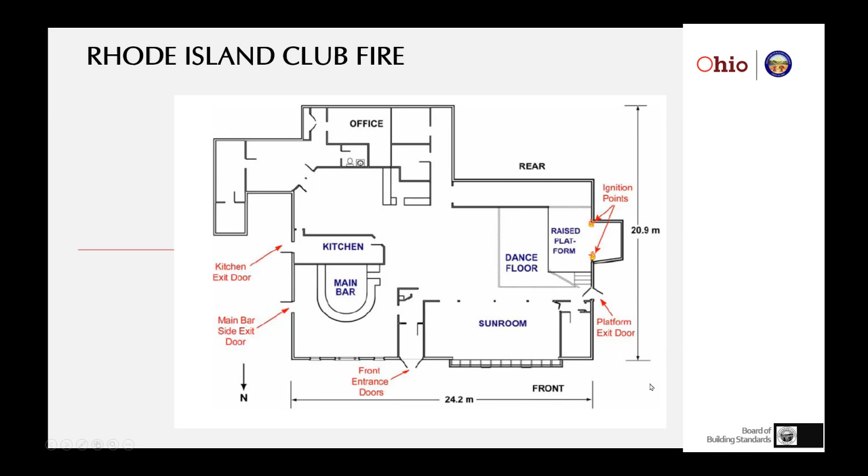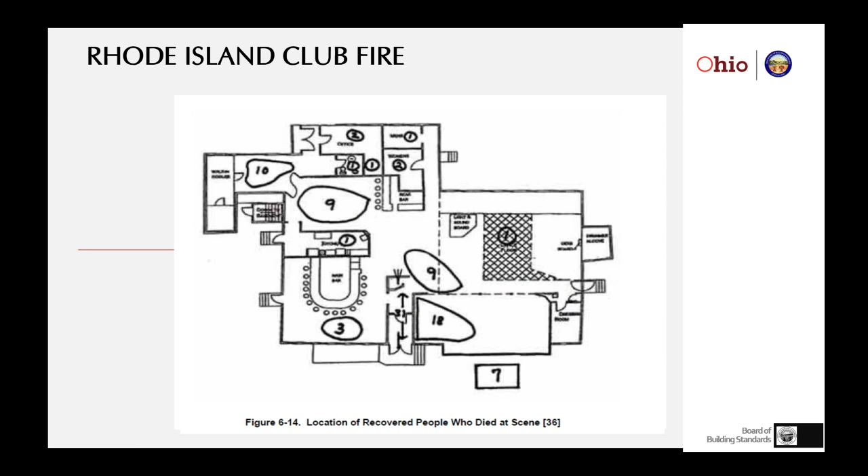Now, these types of problems are why we're trying to understand how to effectively enforce the code and what's behind it. A lot of the code changes that the legislatures, the public demands, are from either excessive enforcement, and that's when the board will get a complaint, inadequate enforcement, when there's usually a loss, or a disaster, hurricanes, tornadoes, floods, and those three things have historically driven what is behind the provisions in the code. In this case, there was inadequate enforcement at this club.

Those materials had been installed without approval. Fire service had done their investigations, and let me just go back, I wanted to point out that there were 100 killed, 230 injured, 132 escaped in 5.5 minutes. The polyurethane foam produced dark smoke, carbon monoxide, and hydrogen cyanide gas.

In Minneapolis, most people don't realize, around that same time, there was also a nightclub fire where the gerbs ignited some material, but we don't hear about it because everyone escaped, because they had actually properly prepared the crowd. They did what the fire code required. They had pre-event announcements of where the egress, the exits were. They had a staff that was trained to assist in the case of an emergency, and all the people there in that Minneapolis nightclub fire survived.

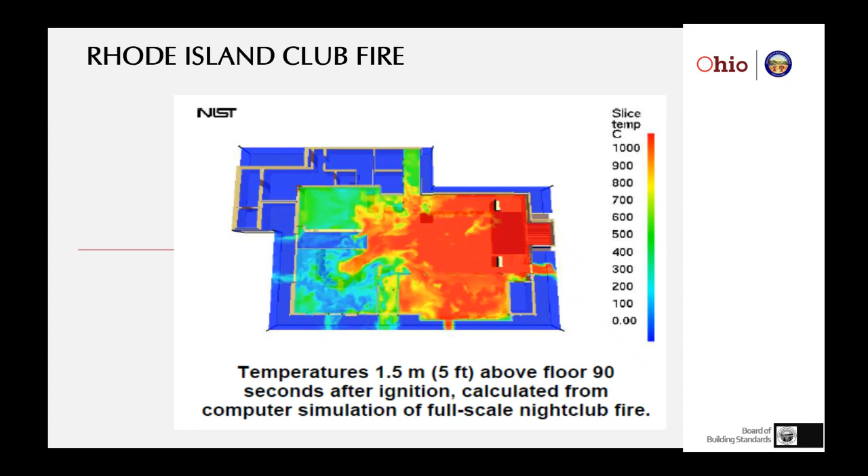So what we want to talk about is these things that have driven code changes and what's behind those provisions and how they impacted the codes. Generally, we respond to these unacceptable losses after an event. And I've gone back to 1906 and looked at some of those events that have impacted the building code. Triangle Shirtwaist Fire had some impact in egress, Collinwood Fire, and a lot of the school fires back in 1908 and around that time.

Egress, protect in place, fire drills, the Cocoanut Grove Fire in Boston, some of the materials that were used in the building, the Beverly Hills, Kentucky restaurant fire in 1977. Some of you may remember that. The MGM Grand Hotel fire had to do with fire stopping at the perimeter curtain wall. The Kansas City walkway collapse really brought Chapter 17 into the building code.

The Chapter 17 that we have today was because there needed to be special inspections for structural components, because the provisions were in the standards, but no one looked at the provisions for change orders, structural requirements, and detailing. And as a result of that, there were provisions put in place requiring special inspections. The earthquakes, floods, hurricanes, Scottown, the Ohio consumer fireworks store back in '96 that killed 8 people, brought in some specific sections in Chapter 4.

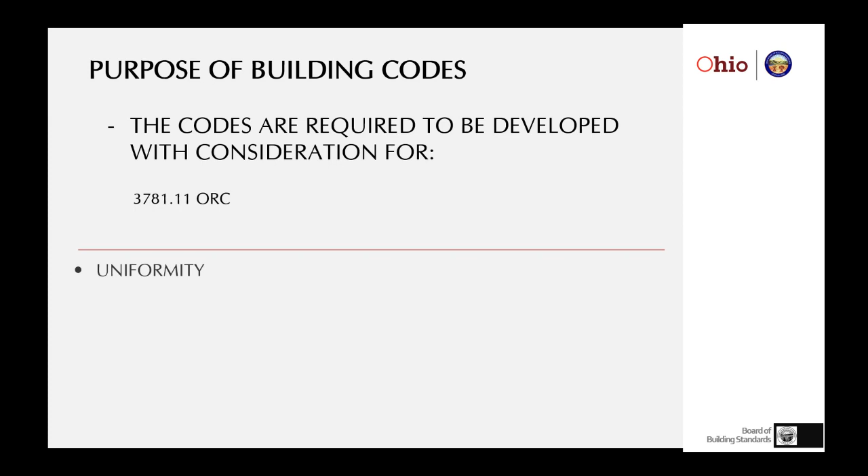When tragedies are tied to the code, the code responds. We want to look at some of those provisions. Now, in our provision of law in 3781.11, the legislature said that the board's rules had to do these 3 things. So what's behind Ohio's code really is established by law. And it's clear that we must develop a code with performance objectives consistent with how materials and products are used.

Permitting new materials and new methods that might reduce the cost of construction, but maintain acceptable risk thresholds. That's another principle that's behind our code. So when the board adopts new rules, we're always looking at the means and methods and its cost impact. As long as it reduces cost while maintaining or improving safety and sanitation, the board will adopt those new provisions.

And then encouraging standardization in methods and materials. Standardization is a great way to drive costs down as long as you don't prefer one material over another. And that's what the legislature said as well. Your rules, Board of Building Standards, should encourage standardization of construction, but they should not prefer one material over another or one class of material over another.

And oftentimes the codes are approached by people as a barrier to entry, as a way of securing a unique, favorable position for their materials. And oftentimes in the code hearings, those are discovered and defeated when code change petitions and applications are submitted. And that also happens at the state level. So at the state level, this is what's primarily behind the codes.

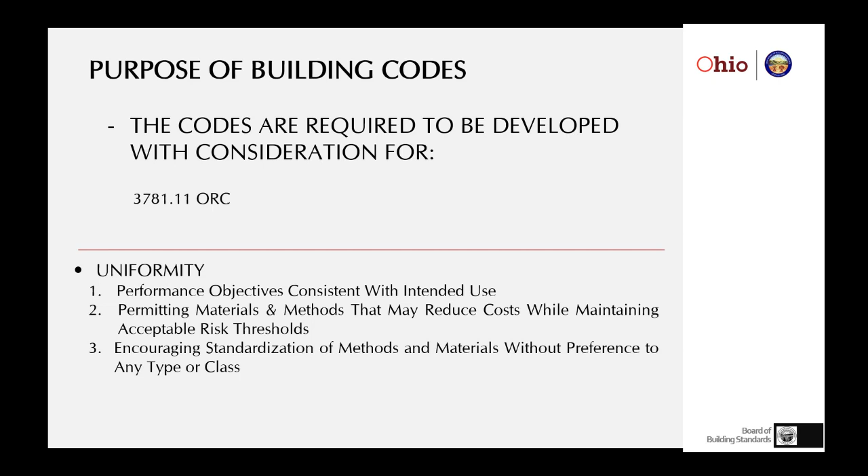There are primary considerations at the model code level for life safety, health, ventilation, plumbing, etc. We're going to provide for a healthy environment. We're going to make sure we keep those in the building safe and those around an event safe. We're going to protect property, whether it's critical facilities protection like police stations, power plants, hospitals. We're going to try to reduce the replacement costs for communities, things such as schools and public buildings, that if we protect them using risk management tools, will actually prevent the public from having to rebuild things.

Quality of life, energy, accessibility, renewable resources, sustainability, green. While those are not life safety provisions, they do impact welfare. They're more policy issues. So those 4 factors are primary considerations for the model codes when those model codes are being developed.

Now, the code types that are being developed generally fall into these categories. There are 3 categories: the land use and environmental type codes. That's the zoning, architectural review, environmental review, that local communities use to establish the baseline for their community, how it should look, where they want things located.

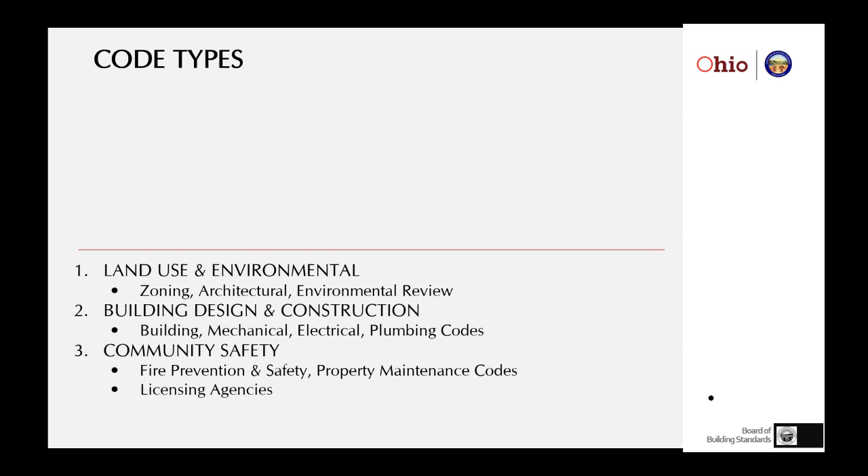And the last are the community safety codes. Once a building is located, once it's built, the fire prevention and safety and property maintenance codes make sure that it's maintained that way. And licensing agencies control who does work in alterations, additions, and repairs in those buildings. So this family of codes helps establish a safe, sanitary built environment with those considerations behind them. Now, obviously, if a code doesn't stay current and becomes obsolete, it's no benefit.

And we have, since 1979, been part of a national model code system that is continuously being updated, whether it's because of new statistics, new methods and materials, an understanding of cost impacts, or certain materials aren't available any longer, or new resources become available. There's a whole consensus standard industry that develops standards that explain how something can be manufactured, built, and installed, and then testing labs and certifying agencies to make sure that those standards are complied with in the manufacturing of materials that get used.

So this national process is fairly complex. It's provided us with one of the best codes. The model code process has provided us with a set of model codes that are probably some of the best in the world.

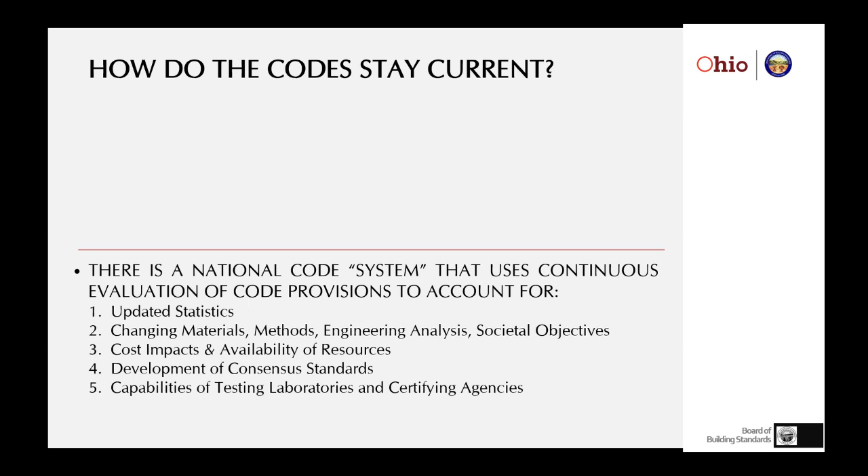This process involves a lot of different types of materials, people, labs, universities, design professionals, contractors, owners, code enforcement people. And most don't understand that there is data, statistics, research behind many of the provisions that we take for granted in the codes. And we're going to talk about a few of those so that we can get a feel for how these understandings and concepts have been developed.

We're going to look at several statistics and some research. Some of it's old, some of it's new, but you're going to find some interesting facts that you can see reflected in fundamental provisions in the building code, whether it's egress, travel distances, fire ratings, all of those things we use to manage risk. So let's look at a few of those. I think you'll find them interesting.

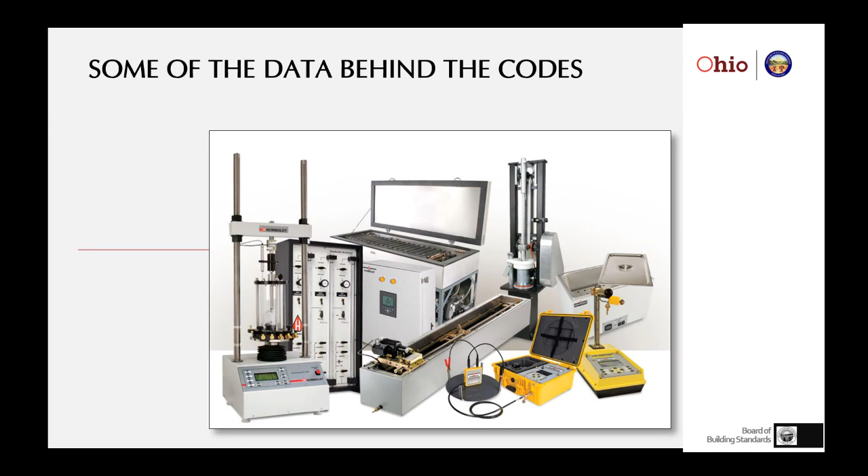First off, when we talk about the building code, we're dealing a lot with fire because buildings are generally made either of or contain things that are flammable, and fire is one of the risks we have to deal with. So when we're talking about responding to fires, we have to understand some things about how people respond. And this is a part of a study of delay times.

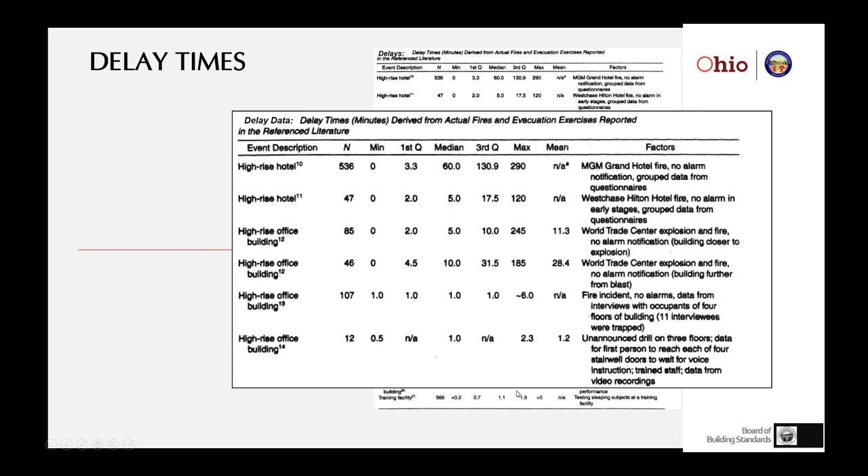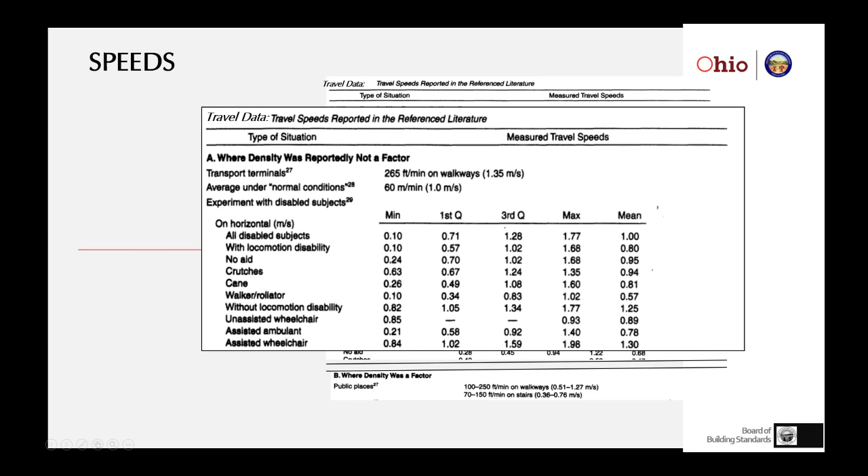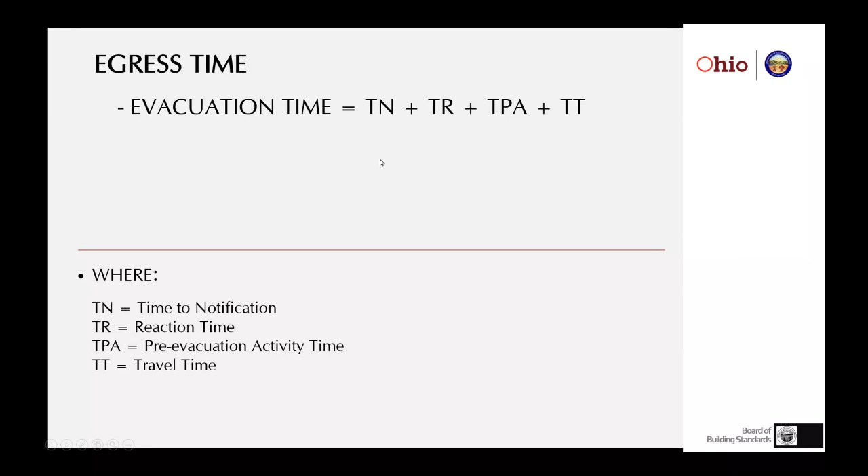And then lastly is the actual time to travel to the exit discharge. So when you add all of those things up, you get a much different period of time than just the travel time. And all of those are considered when we're talking about the evacuation time and travel distance when we're talking about egressing a building in an emergency.

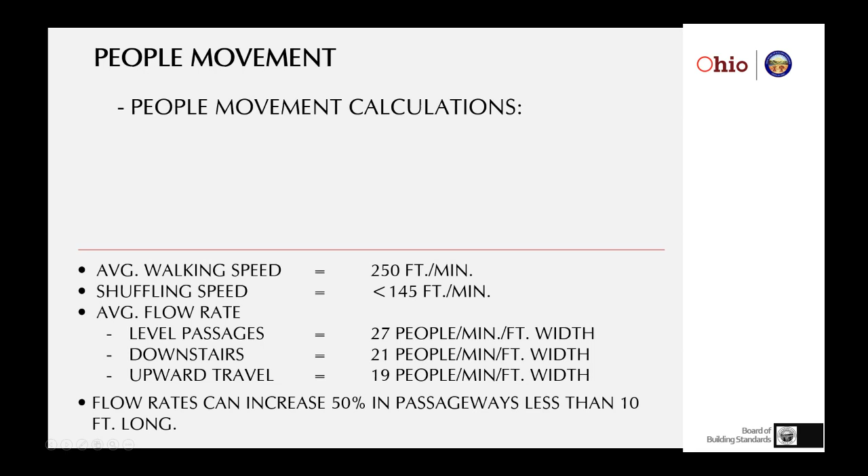So that gets to be very difficult when we're trying to understand how people move, and lifting your body up steps is obviously more strenuous, takes longer than dropping your body down steps from an elevated floor. You know, it's interesting to note that flow rates can increase by half, 50%, in passageways less than 10 feet long. And as a result of that, you can understand why dead-end corridor lengths get to be critical. Because at some point, that passageway, that dead-end corridor that's longer than 20 feet, can actually increase egress travel. Now, all these studies that give us these numbers are incorporated into sizing our egress system.

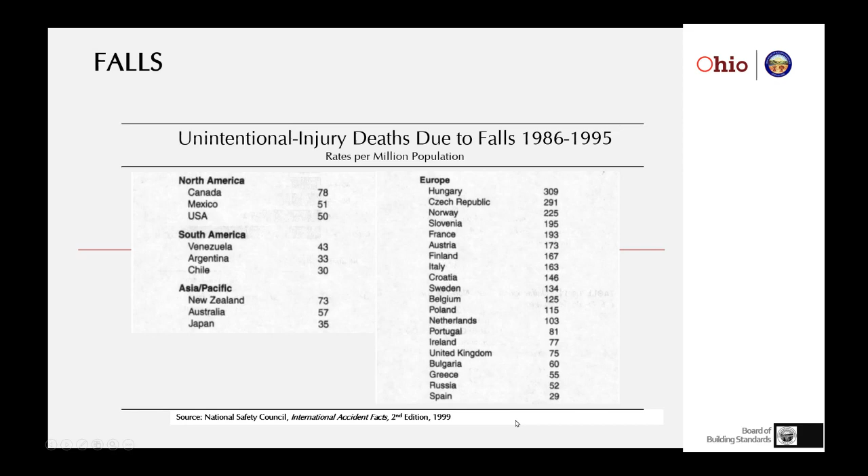So this type of information is fundamental to understanding how the code can address those egress and walking surface issues that deal with lighting, changes of levels, uniformity of egress stairs, that type of thing that gets built into the code.

Now, if you look at what happens with age, and this is more and more obvious to me as I get older, you'll notice that the World Health Organization has broken down the world into 6 zones or regions, and it looks at the differences by age and by male and female, the mortality rates from falls.

Now, if you notice, all ages, generally, guys die from falls more than women, and that's just the way it is in almost, I think, every case. Not quite 2 to 1, but sometimes more than 2 to 1. You notice in the Americas, it's more on parity, but many of these countries, it's more than 2 to 1.

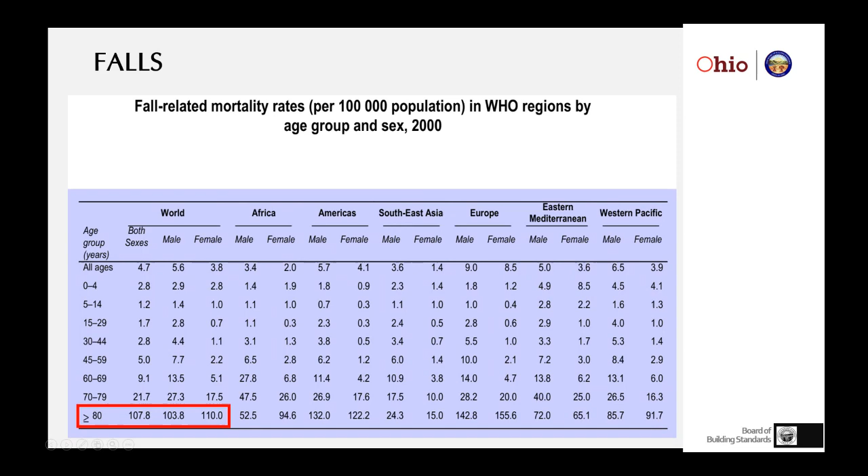Now, when we look at falls and we start to apply this to buildings, we look at stairs and steps, ladders, or stumbling, and next to that, other falls from one level to another. Now we get to see, relative to the type of falls, where people fall the most, and these numbers have been increasing steadily. And you'll see that the stairs or steps, the third column on the left, 1389 in 1998, and falls from one level to another, 1187, dominate where we would find people falling.

So we want to make sure that stairs and steps are safe, the tread and riser heights are uniform, they're secure, the handrails and guards are secure, and those surfaces are well lit.

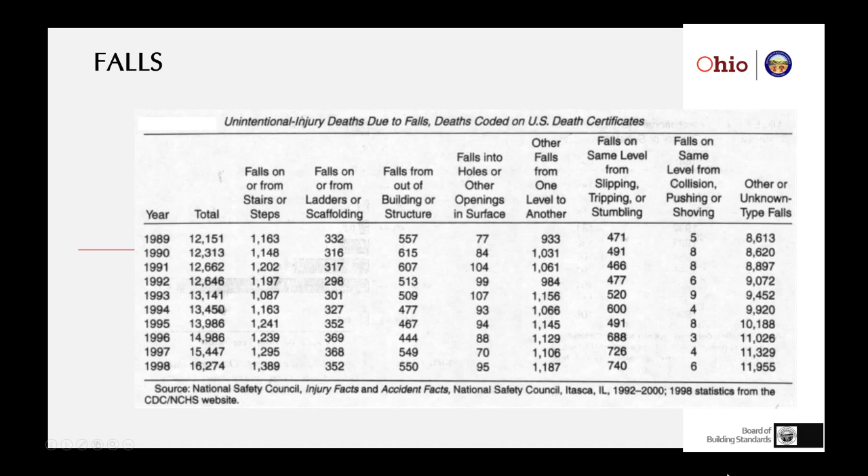Now, this comes into play when you make an evaluation of what a serious hazard is, because if the existing building that you might be looking at doesn't have proper illumination, treads and risers aren't the same height, or they're loose, or the handrail is loose or missing, we have some context for saying that's a very dangerous situation, because we know that there's a high risk of death from those types of falls.

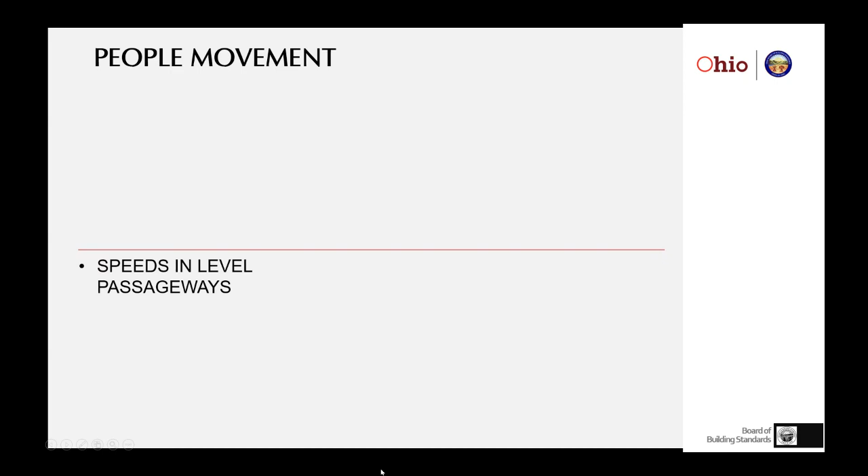And in studying people movement, especially in level passageways, because generally all of our corridors, hallways, lobbies are level, this chart kind of helps us understand what happens as speed decreases. The left column is 1, 2, 3, 4 miles an hour. And across the bottom is the number of square feet per person. So at 20 square feet per person, generally people are moving at about 3.5 miles an hour.

As I decrease the square feet per person, 15 would be considered tables and chairs in an assembly occupancy. If I'm egressing from there, I'm slowing down to about 3 miles an hour. At 7, where I have unsecured loose chairs, I'm down to about 2.25 miles an hour. And down at 5, where we have standing room only, you can see you're into the shuffling range and you're only moving at 1.5 miles an hour.

And as I decrease the square feet per person, eventually, as I approach 2, which looks a lot like what might be the case in that nightclub fire, you can see that I'm barely moving at all, or I've stopped. And once they started pushing to the exit, they were less than 2 square feet per person. Generally, that's a jam. That's where people are not moving. Then they start pushing and climbing over each other, and that's what happened at the doorways to that nightclub fire. So these pieces of information help us evaluate the risks in buildings.

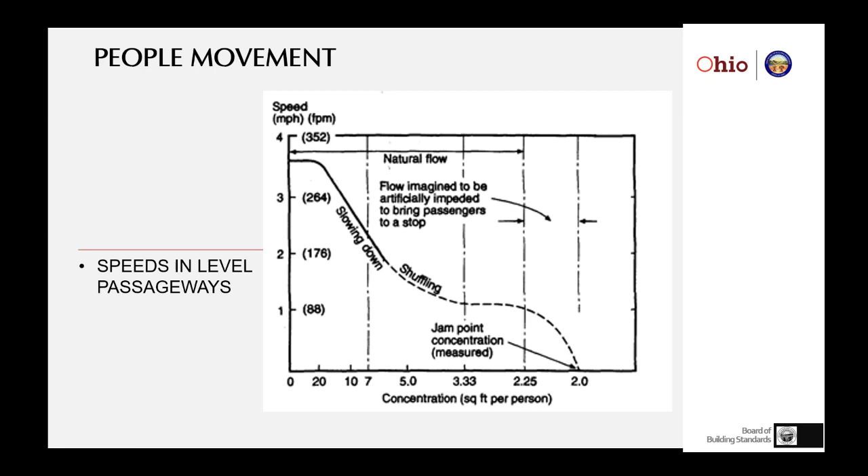And there's a second chart I wanted to show you. This is from a 2015 study of a heterogeneous population, meaning they had people of different capabilities, different walking speeds, and you'll see again meters per second, people per square feet at the top, feet per second to the right, and you can see that same curve. As the density goes up, the ability of people to move drops dramatically and can lead to death in the event of an emergency.

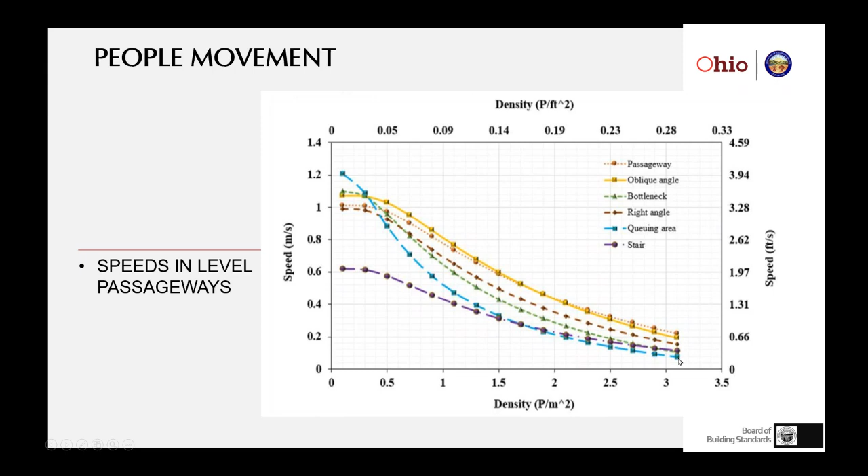Now, there are some assumptions when we're dealing with evacuations from a fire that are built into the code. There are methods to bring people to safety, and you always have to consider the combustibles and the commodities and how they burn. Research has been done, testing has been done to develop smoke development ratings and smoke spread, because we need to know how that stuff burns, what gases it off-gasses when it burns and how quickly it burns. That's all provided from testing materials used in buildings, because it affects the tenability of the space.

Now imagine a fire starts in a room. Depending on the type of materials, it burns at a certain rate. And as it burns, it produces smoke and toxic gases. So there will be a level that begins to move down in that room as that smoke gets parked at the ceiling. And as more builds up, that line of tenability moves down. And at 6 feet above the finished floor, now my face is going to be in that smoke. And if it takes me long enough to get to the exit access, I may be overcome. And even if I begin crawling on the floor, eventually that whole space will be filled with smoke, depending on my proximity to the fire.

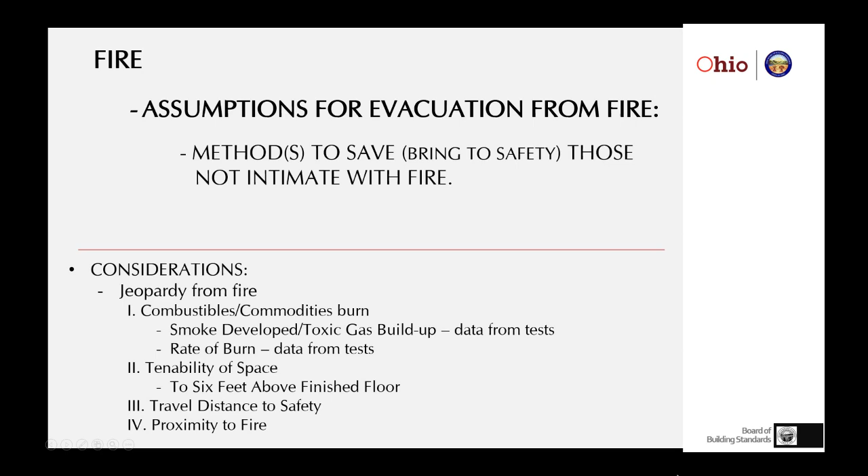Those pieces of information dealing with tenability get to be incredibly important. And we want to talk about some of those tests and how that data is produced. A fire scenario generally works like this. They'll have a room, and they'll use a commodity like oak as a baseline. They'll put a grid of this oak material in a corner, begin to burn it, and measure the rate of growth and how much smoke it produces, and that red oak becomes the baseline against which we compare other materials. We measure the heat it releases and the time it takes to make that space untenable. Because of that, we can predict with some certainty how many people can be in a space and evacuate, and the travel distance that's necessary in uncomplicated circumstances.

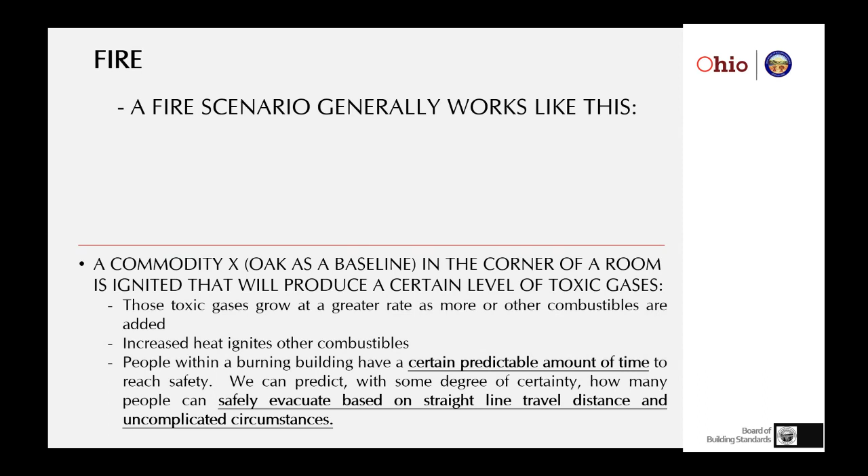So I'm going to show you a picture of one of those tests. This is a furnace that is burning a product or a material, and you'll see that it's the ASTM E119 test. This is a protocol that lays out how and what has to be tested. You can see the sensors on the glass. You can see all the wiring that connects to the evaluation equipment. And notice this particular fire has been going on for 1 hour, 11 minutes, and 4 seconds. So this material may have a 1 hour rating.

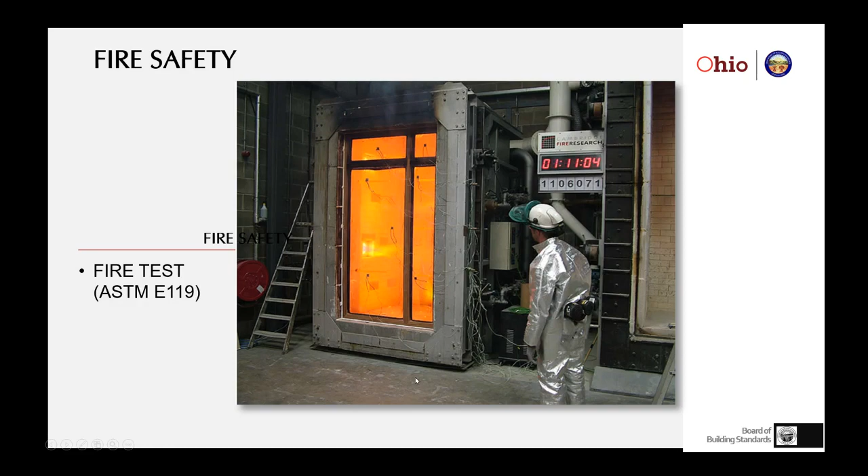This may be testing a wall panel. They may be testing some other material. But this furnace and this method for evaluating materials is done for almost everything done in a building. In fact, you will find wall assemblies, for instance, that will be put in a furnace, just like the one we looked at. And there will be temperature readings at the interior and exterior surfaces. And then internal to the material, there will be temperatures taken, and those will show the time temperature curve.

You notice that on the inside here, it indicates that there's 1900 degree temperature measured on the fire surface. And as I move through the material, the temperature drops until the back surface is only 130 degrees. Now, it might be a little warm, but I'm protected from fire for a given 2 hour exposure if I build this wall of this material fastened in a certain way.

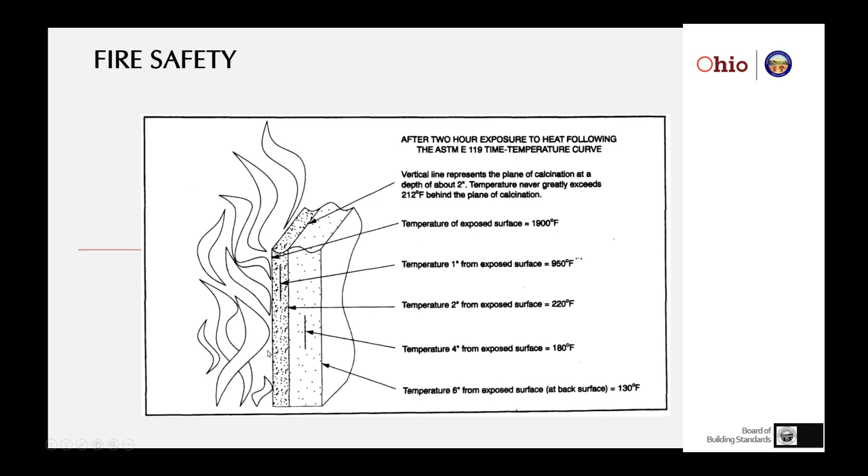And that rating and listing then is cataloged so that designers can use it to provide a code compliant separation from another tenant, another space, another occupancy, or another hazardous material storage. Now, the equipment we use to do that are things other than that furnace I showed you. For instance, this is a device whose protocol for using is set up in NFPA 253, and it's a radiant flux test. It's really curious. This is kind of interesting.

This test was developed over 30 years ago, and it measures radiant flux, obviously, but that means the rate of the flow of energy as radiation, heat, measured in watts. And what happens in this tray, you'll mount a material, a carpet, or some other material that will lay flat where those two handles are on that midsection of the device. And on the right side, it's closer to this angled heater. You see this angled device inside that chamber. The door is open. That is ignited. It's a hot surface, and what we're trying to measure is the time it takes for that material to ignite.

And as the flame moves to the left in this tray, it's moving further away from the flame, and we're measuring how much energy it produces in watts, how long the material will burn, and when it will ignite, because as it moves away from that source, there's less and less radiant energy from that burner, and we're trying to measure how long it takes, how far it will burn, and if it will self-extinguish as the temperature diminishes.

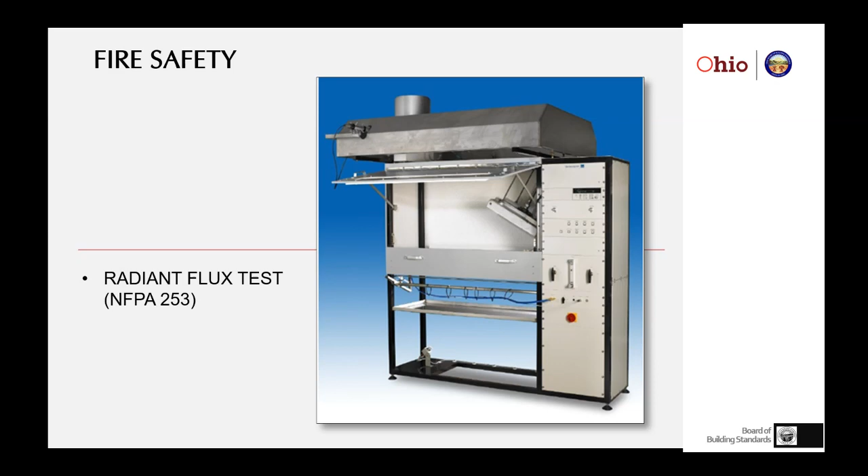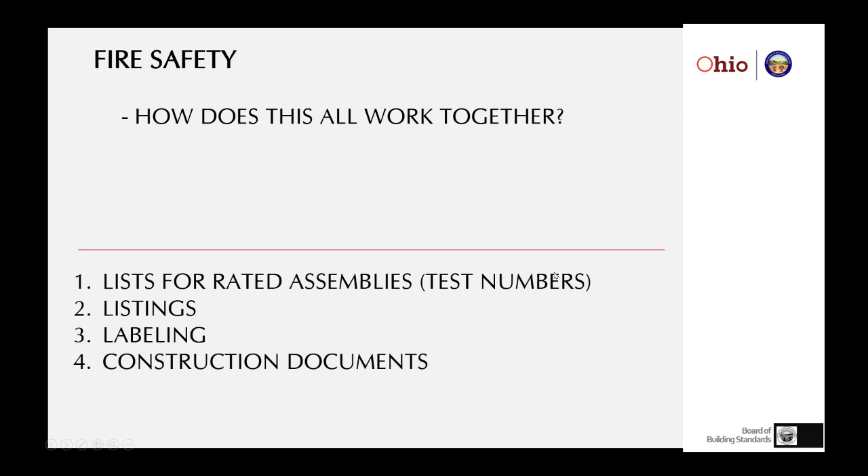Now, this is used for a lot of materials, and the information we gather from inside this test chamber then gets applied to those materials as an NFPA 253 compliant material, and can be used in a certain way, in a certain application, with a certain rating. And all of this works together because we will rate assemblies, give them test numbers for burning in a furnace. If they comply with a standard, they'll be listed in a listing like UL or some of the other Warnock Hersey listings. It will have a label attached to it. Many of the tests that are done for most materials result in a label being affixed to a material or device.

And then the construction documents reflect those code requirements and incorporate listed rated assemblies, listed and labeled materials, and in enforcement, our job then is to field verify that what was specified, what was approved, is actually being built. Without that testing, without that listing and labeling, this would be almost an impossible process.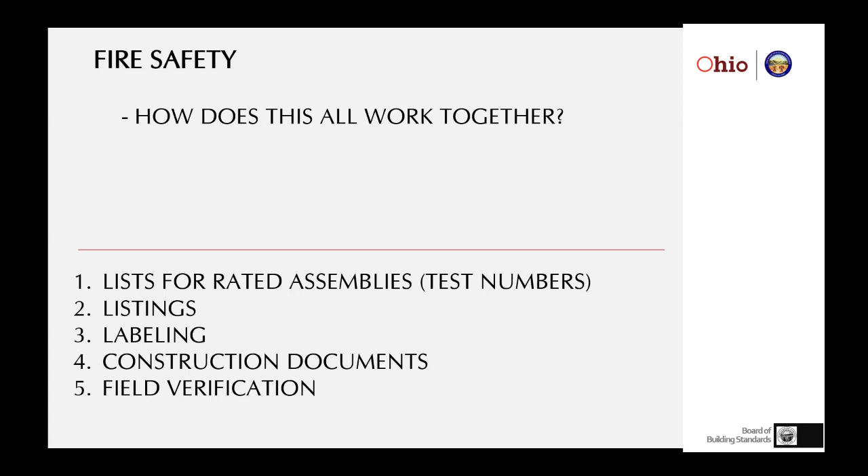2 years ago, I met with some building officials from, I believe it was Pakistan, and some of these countries do not have the testing, listing, labeling, the university research that we take for granted, and it's a very difficult process then to assure that buildings are safe and sanitary without this underlying basis of research, data, statistics, and information.

You'll see many of these things. For instance, the Gypsum Association puts together a fire resistance design manual. When I have to separate spaces, creating a protection for adjacent spaces by putting rated assemblies in place, I may use one of the manuals like this that includes detailed information developed from testing. And you'll notice this tells you here were the fire tests that were being done, bottom, middle of the page, UL R11270 or UL Design U329. And there's even a field sound test that was done.

But this assembly, if it's built this way, one layer of half-inch thick proprietary cementitious backer, 2x4 wood studs, 16 on center, 1.5 galvanized roofing nails, or 1 5/8 wafer head screws. It gives you the spacing, what type of insulation was used, the proprietary gyp that had to be used. All of this is a description of WP 3441 up there in the upper left, a 1-hour rated assembly.

And that's how we assure, because it's been tested, that we can provide a 1-hour amount of time that occupants on the other side of that rated assembly can egress in safety, protecting those around the fire.

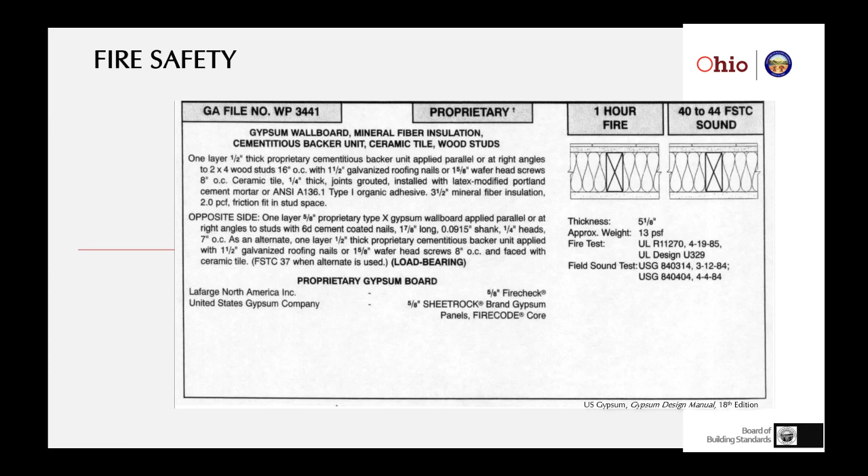Things like, sorry about that, things like whether occupants are sleeping or not. If we have sleeping occupancies like the institutional occupancies like hospitals, or the residential occupancies like R1s, 2s, 3s, etc., occupants in a building are high risk, and we have to address that risk by doing things like incorporating smoke alarms, suppression systems, horns and strobes that basically replace a person and the person's senses.

Because when you're asleep, you're almost paralyzed, it would be as though you were hiring somebody to stay awake and listen, hear, feel, and yell if there was an emergency. We do that with devices like smoke alarms, smoke detectors, annunciation devices that yell, smell, and see if there's an emergency. So we build those things in because sleeping occupancies are high risk.

Another risk factor is familiarity with surroundings. In your home, you're much more comfortable if there was an emergency than if you were in a business somewhere, in an office building somewhere that was not a place you're familiar with. So familiarity helps reduce the risk, and how familiar our people are with their surroundings becomes important to understand.

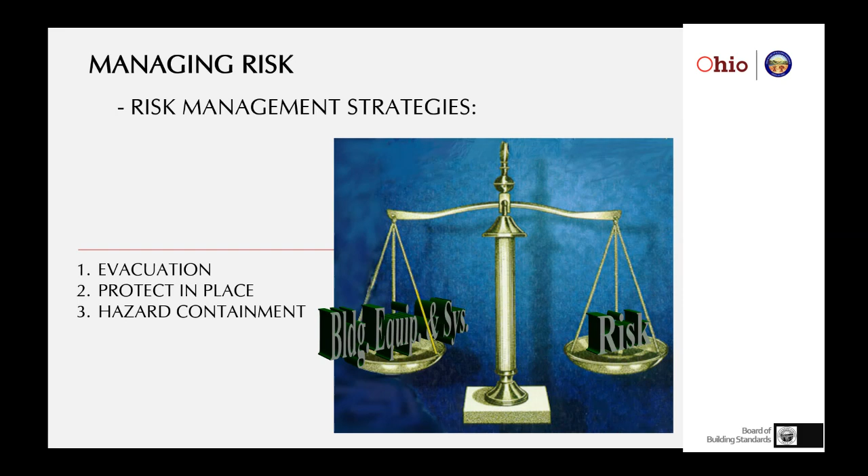So there are different strategies, but we're trying to make sure our building, equipment and systems are at balance with the risks that are produced by how a building is used, what it's made of, and how big it is. Now, as risks increase, then we have to add features. For instance, from fire, as risk conditions are added, they must be offset, and the purpose is offsetting those risks.

For instance, there may be a required amount of travel time to safety. We want to assure that as risk conditions are added, they might require additional amount of time to get to safety because I've added risk features, like increase in toxic gas production, which would reduce the time we have to reach safety. So depending on what's in that building, I've got to add features to manage that risk in that occupancy.

Increasing travel distance obviously increases the time necessary to reach safety. So if I have increased risk, I have to understand that as my travel times increase, risk levels go up because I need longer time to reach safety. And if there are materials that are introduced, I may have to build extra building features in to deal with that additional risk. And delays in the time when occupants are warned increases the time necessary to reach safety.

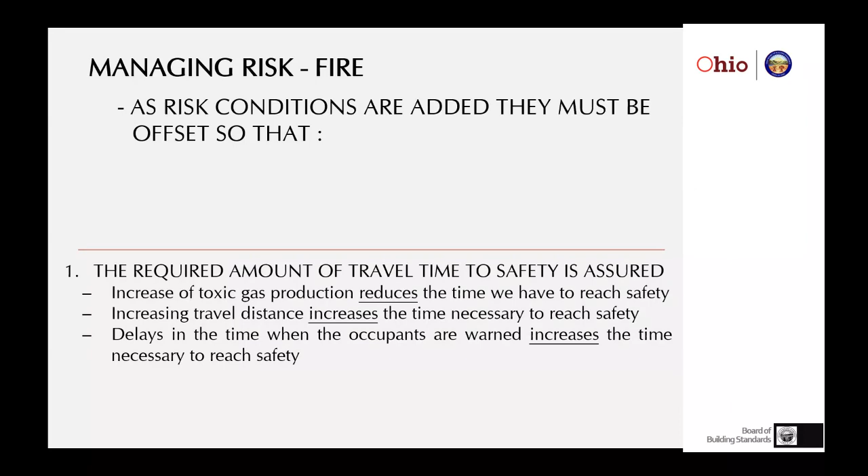So all of these things I need to assure I understand as a designer, use those strategies for managing risk, and we do that in the building code through several things, like a fire protection system. I'm going to design a fire protection system for a specific commodity that's under it. Fire protection systems aren't one size fits all. Their commodities are determined, what it has to react to, depending on how much heat is produced, how fast it burns. Those factors will help me determine what type of fire protection system, the density of heads, the amount of water flow that I need to incorporate into a building.

The egress system is a way I manage the risks in a building. That egress system is not often thought of as a system, but depending on my travel distances, my numbers of floors, the type of hazards I'm exposed to, the capability of the occupants, my egress system has to respond. And that's how I manage some of those additional risks, by managing and adjusting my egress system.

The fire resistance and fire separation become critical in multi-story or multi-tenant spaces where an adjacent space needs to be protected from an adjacent occupancy of different fire risks. And so understanding how a building and how adjacent spaces in a building are used is necessary to develop the right separation and resistance ratings for those components of the building.

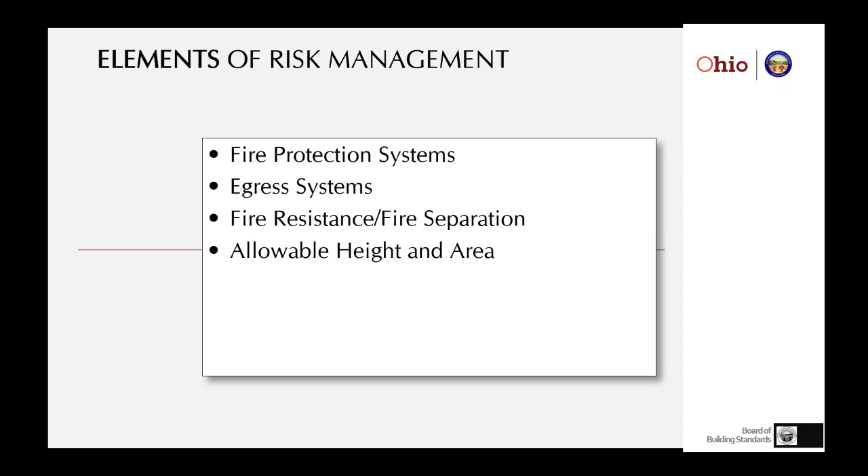Also, we will see structural requirements that are incorporated, different structural requirements for different components. The main structural components of a building might need to be protected to a greater degree than other components, depending on how a building's used and what it's made of.

You'll see construction type, a classification of different types of construction so that I can rank, classify hierarchically what a construction material can do as it performs in an event of emergency, a fire, seismic loads, wind loads, snow loads. So that construction type is a risk management tool, as well as the pieces and parts I put into that building manage risk.

The mechanical system provides fresh air, provides heat, cooling, and the larger a building gets and the taller it gets, the more important for those occupants is the ability of that mechanical system to deliver conditioned air, or sometimes even to be used as a smoke evacuation system when it's run in reverse, basically.

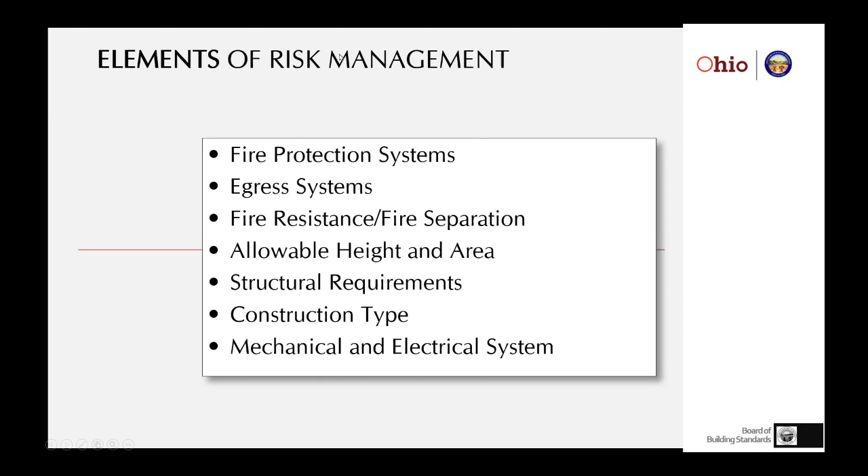Or the electrical system is a way to manage risk. That electrical system in a building will power many of the components of the system that will warn me in the case of an emergency and provide lighting. And even then, the electrical system will include things like battery backed up components to make sure that at all times the building's occupied, those safety systems manage the risk in a building.

Now, oftentimes people don't, as I said, for example, consider an egress system a system. And I just wanted to show you what I mean by that. In every building, in every space, you'll have a system that helps me egress safely. That means from the point of time and space where I live in that building to my exit access, down a corridor to the exit access door that gets me into the exit, that's a protected, rated, safe haven, that gets me to the exit discharge where I leave the exit, and to the public way, the safety.

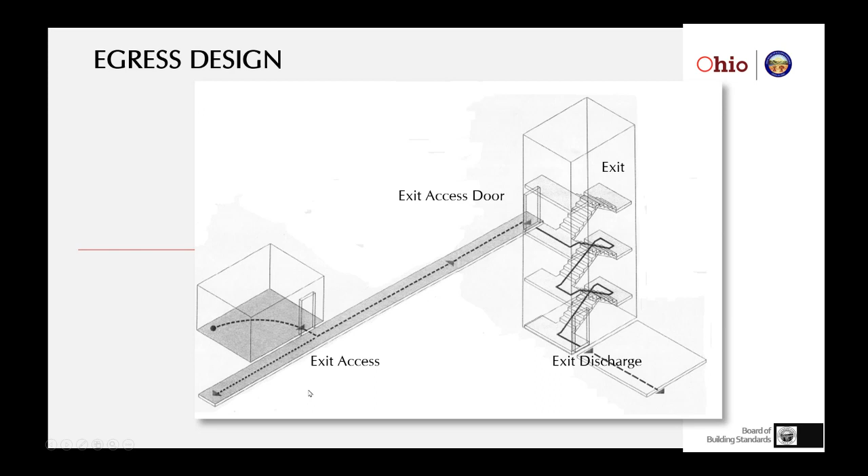That system must be designed with the many, many variations on height, area, occupancy, use of a building, construction types, and all are designed to make sure that occupants in a building can egress in a reasonable amount of time with respect to the risks that are available. And that system is critical. That's why you'll spend much time in Chapter 10 and Chapter 7 dealing with these pieces and parts of this egress system. And we could do the same thing for each one of these other systems that are used to manage risk in a building.

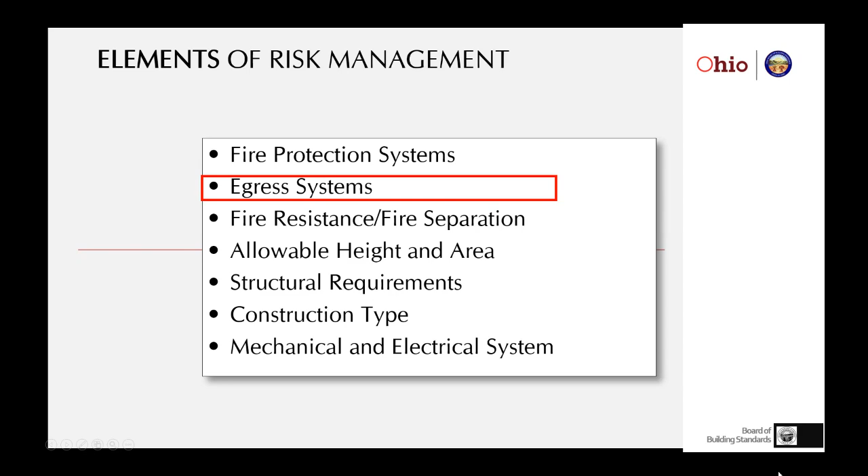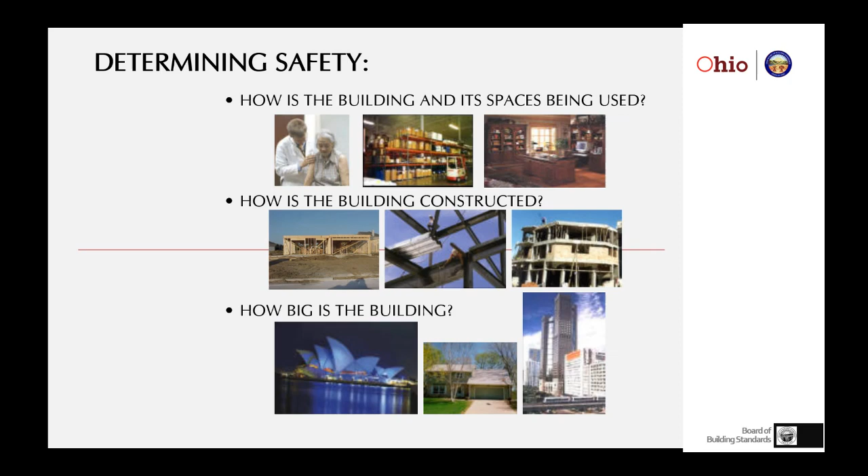Now, when we're determining safety, we're going to ask how is the building and its spaces, how are they being used? That's critical. And then how is the building constructed? What is it made of? And how big is the building? And those risk factors and those tools to manage the risk are the fundamental backbone of the building code to help us provide a safe and sanitary condition that meets the intent of the law, that doesn't show preference of one material over another, that provides for uniformity, and it sets performance objectives that designers can meet to assure the building is safe and sanitary.

And when we use the codes, there's a whole process of code development that you can see starts with the design of a building, continues through the review and approval, and once that approval is given, because we have looked at the risks, we've developed risk management strategies, and we have designed a building to comply with those risk management provisions in the code, and that information is passed on to a building department for review and approval.

And the importance of that approval is that the law says that when an owner in good faith manages the risk in the building they want to build through the code provisions, the building department will give an approval that becomes a license. And that license indicates that the building owner has a legal right to build what was reviewed and approved, because the process has confirmed that that building has managed the risks that were endemic in how a building is going to be used, what it's proposed to be made of, and how big it's proposed to be. And that license then is initiated in construction beginning.

And once construction begins, there's a trust but verify process that begins. And the building department is to make inspections, not to approve anything any longer. The building has been approved, but make sure what gets built matches what's approved. Because when the building matches what's been approved, there's a high level of assurance that the risks have been managed and the people will be safe and sanitary in that building.

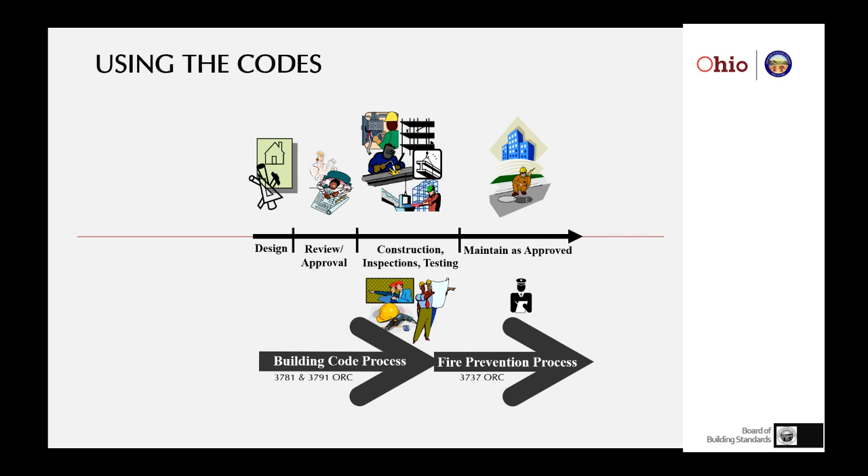And people can be assured, your spouses, children, and relatives can be assured that a building is safe and sanitary to use, that the built environment is safe, and that it has been developed through requirements based on rigorous testing, rigorous research, and not arbitrary provisions that favor one material over another. But when done in concert with good, effective inspections, can produce a safe and sanitary building.